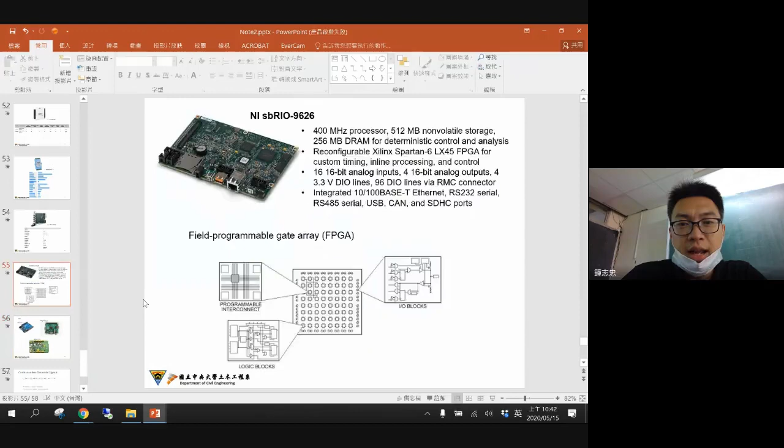This module is from the NI instrument. Right now I'm using the 6000 series for teaching purposes, but this kind of module I also use in my other course for data acquisition. Some of my friends will go back this summer, or otherwise you can choose the LabVIEW course. For this data acquisition, you need to install LabVIEW first.

So here I would like to show you a very quick demonstration regarding the USB 6000. No, they use the NXG. Oh, sorry.

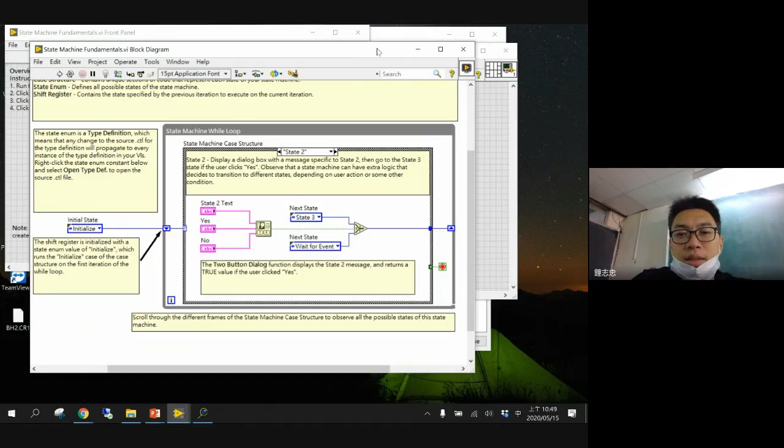I just have a quick example for you of LabVIEW. So maybe in my midterm exam, I will ask all of you the same kind of questions. If I have the purpose of monitoring an earthquake, maybe I will list 3 or 4 DAQ options, and you need to choose the better one for your project and explain why. I think this is a very typical and very practical issue if you are an engineer in the future.

Any questions regarding signal processing and data acquisition? Okay, if none, I think we are going to have the third part. I would like to remind you again, our midterm exam will also include the third part, data interpretation. But here, I think we will have a very good example for you to understand what data interpretation is.

Because right now you have the capability from sensor knowledge - which kind of sensor you need to use. Maybe you need to measure the temperature, you need to measure the water level. So you can choose a better sensor for the monitoring.

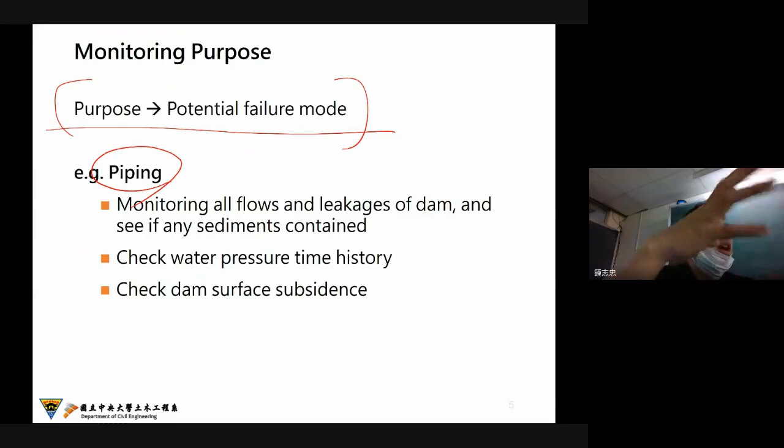For the earth dam as an example, next time we are talking about piping, which will be a very important failure mode of the earth dam. Because if you have piping, it means you have a path inside the earth dam, and this path will become larger and larger, so some of the soil will be lost and you'll have a very big and dangerous path inside the earth dam.

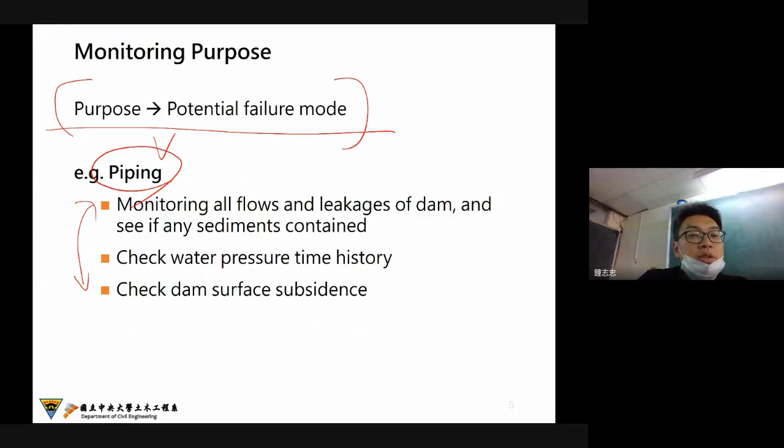So how do we prevent the piping problem? If you already know the mechanism of the piping, what are you looking for as a potential failure mode? Maybe you need to monitor the flow condition inside the earth dam, and also maybe some leakage outside of the earth dam.

Because you can never stop the water flow of an earth dam, there's always leakage, water leakage. But you need to find if this leakage volume changes quickly or not.

And see if there's any sediment inside this leakage water. Supposedly if you have a very good condition and filter for the leakage, the water flow should be clean without any soil particles. But however, if you find that the earth dam's leakage has some soil particles, it means maybe we have the piping problem.

As I said, a path inside the earth dam, and this path already has scour and erosion of the internal soil. So this will be the problem.

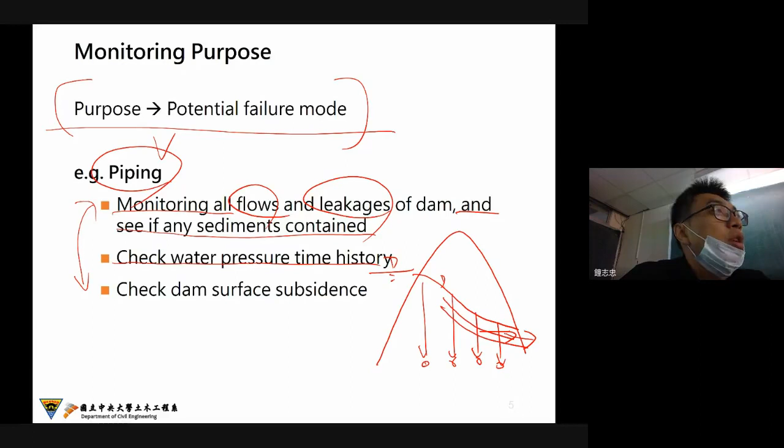And also we need to check the water pressure. We may check the water pressure at different locations to make sure that the underground water level keeps constant. Otherwise, if you have a rising water pressure, it means I have a path of leakage, so it is very dangerous.

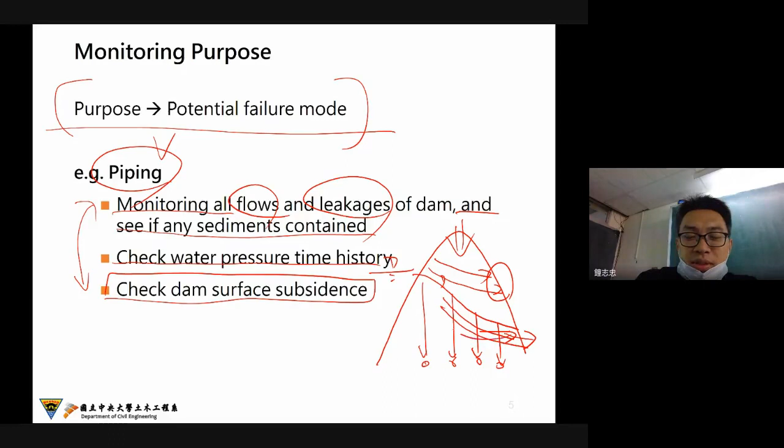And also we need to check the length, the subsidence of the dam, because if I have piping inside this earth dam, I already have internal erosion, so maybe the earth dam...

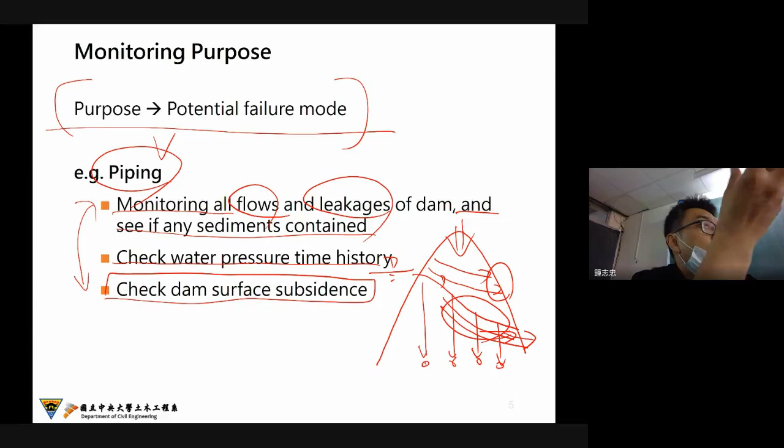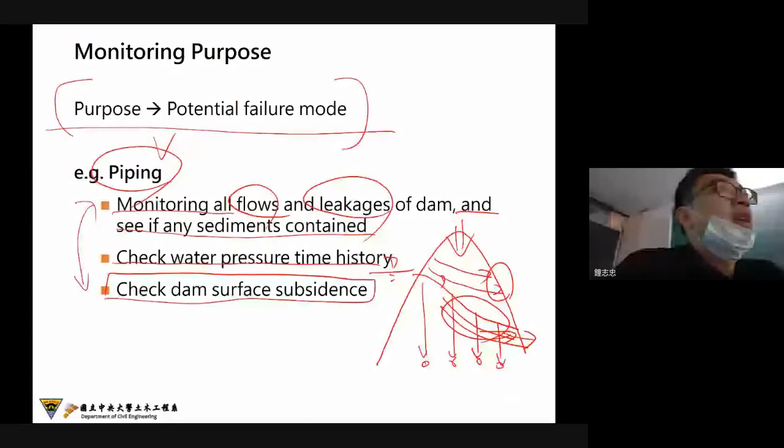Understand the potential failure mode first. So I would like to say this is the basic of the monitoring. Based on this, you will know where the location is that I need to put the sensor, and what kind of message I need to look at.

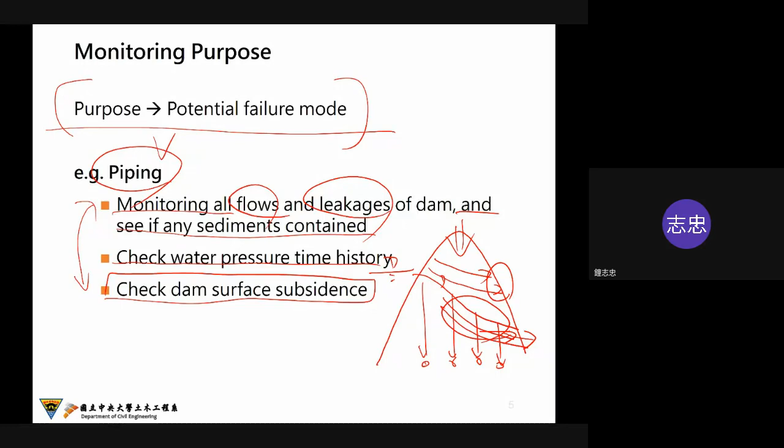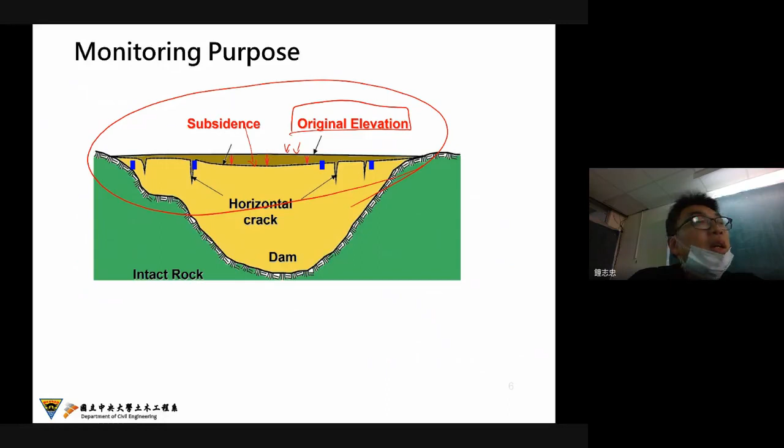So here, this is I think the demonstration showing subsidence. So this is the original elevation here, and here this is the subsidence because of maybe the piping or the leakage, internal erosion.

In this chapter, I would like to show you some methods to help you understand, if you already capture this kind of data, how can you decide if the situation is good or not. So how do you define a criteria? Here we have two methods: one is the qualitative method, and the other is the quantitative method.

I think you already know about this. For the qualitative method, we use some indices: stability, correlation, rationality, consistency, mutation, and symmetry. In the first step of the qualitative method, you don't need to have detailed calculation or some program processing. You just need to know that these indices, maybe six of them, are for the first judgment of the criteria.

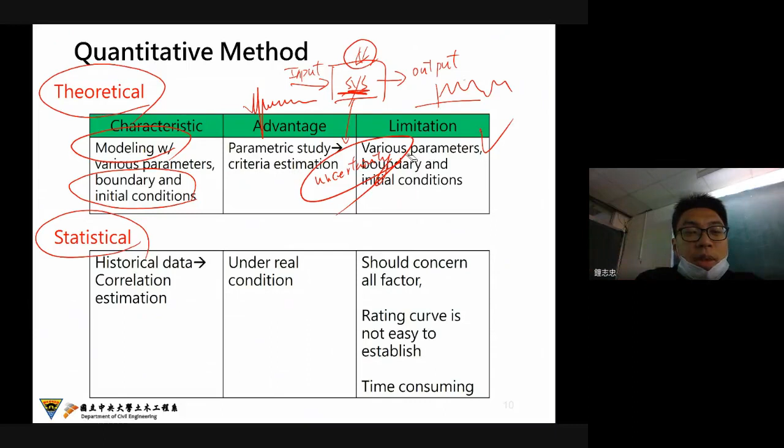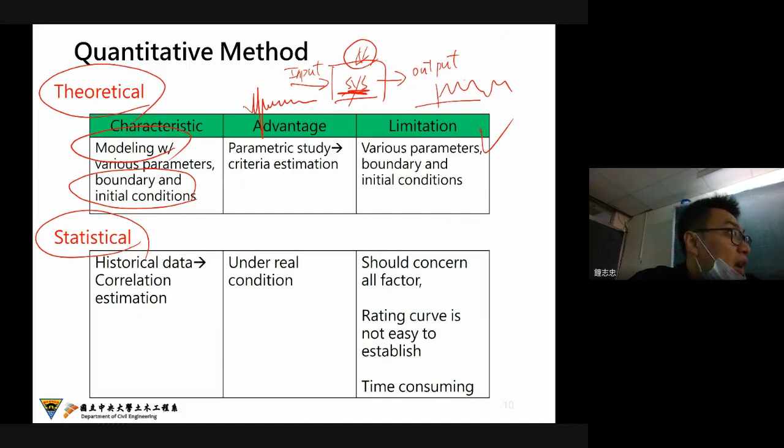So of course, if I cannot fully understand the system, there may be some uncertainty because of unknown parameters. So here is the limitation of the theoretical method: you need to access all the parameters of this system first, and of course you need to access all the boundary and initial conditions, so then you can simulate and have a forward model to predict the behavior. So this is the theoretical method.

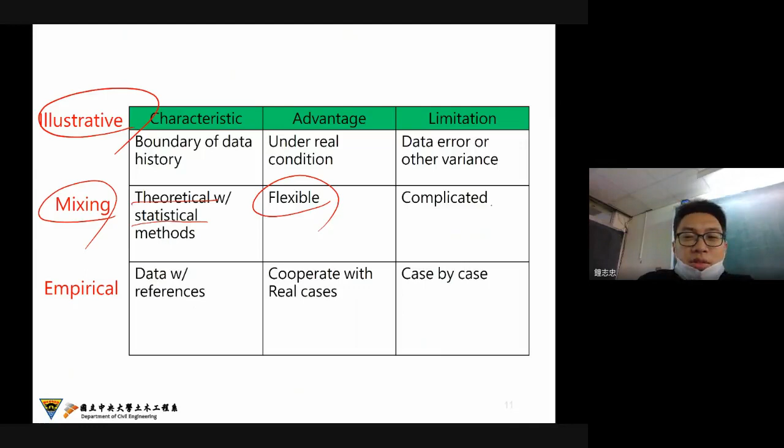But somehow I would like to say, for geotechnical applications, it is hard to find all the parameters. So I would like to say, most often we use the statistic method to quantify the data and find the criteria for early warning. Here is some of the illustrative method. I would like to show you next, and we can mix the theoretical, the statistic, and also the illustrative method together. It should be much more flexible, but if you combine several methods together, you need to think about more. Finally, there is the empirical method with quantified data.

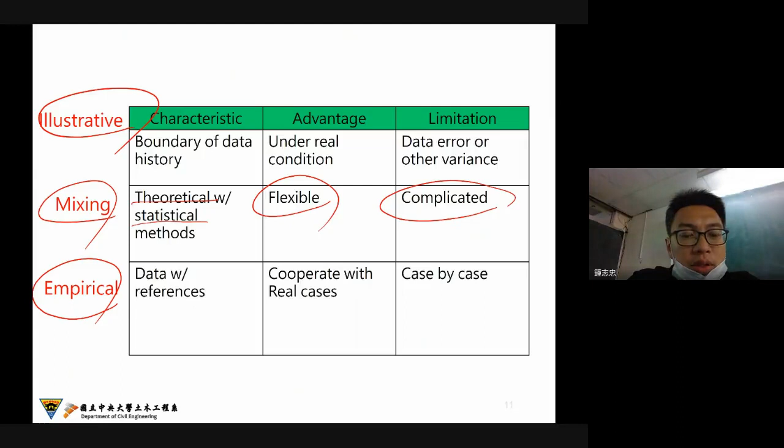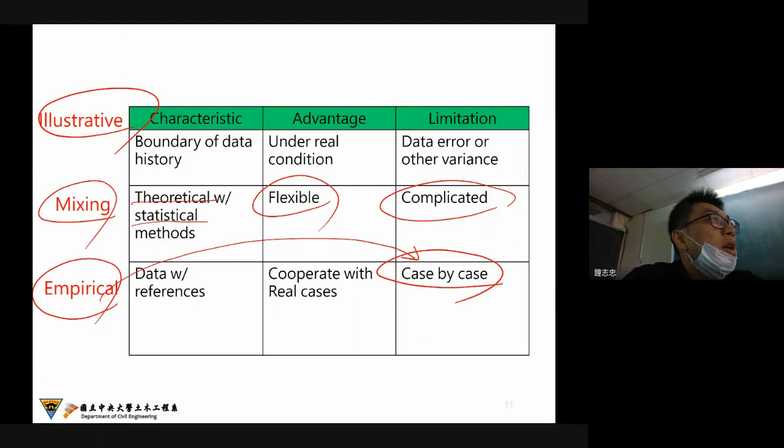But I would like to say this will be case by case. This is not a universal solution for all. Using empirical data, it can only be used for the specific case.

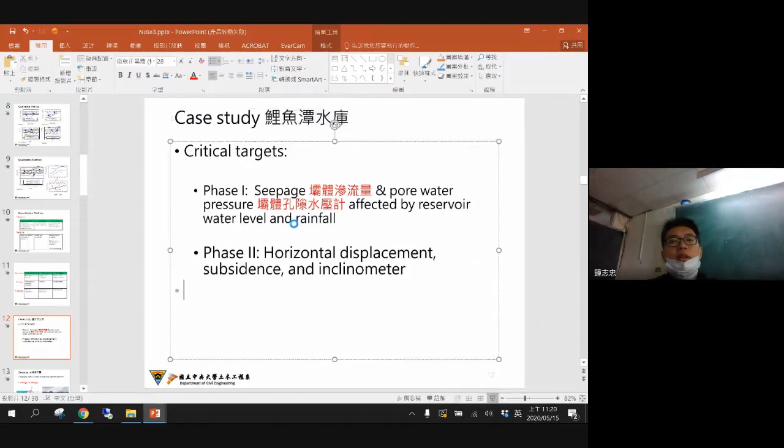The first part of this dam safety interpretation, I'm trying to monitor the seepage, the flow, the volume of the leakage, and also the pore water pressure, against the water level and the rainfall, because I'm trying to quantify the relationship between the seepage or the pressure with the water level and the rainfall. I want to understand the behavior of the seepage. If I have a big problem of the seepage, I would like to extend to phase 2: the horizontal displacement and the subsidence, and also the inclinometer inside of this earth dam.

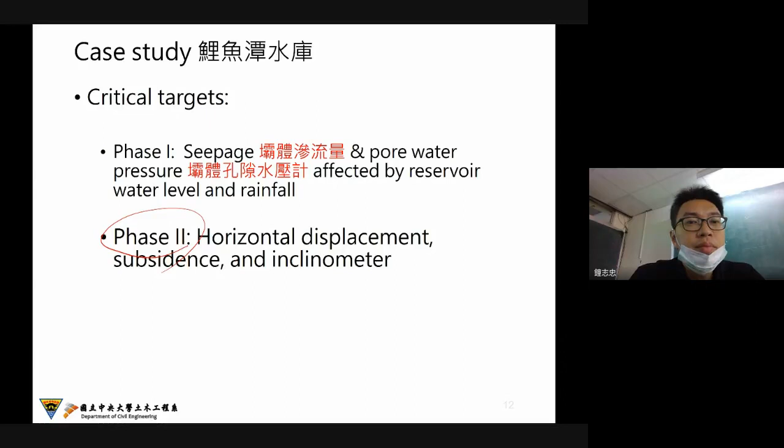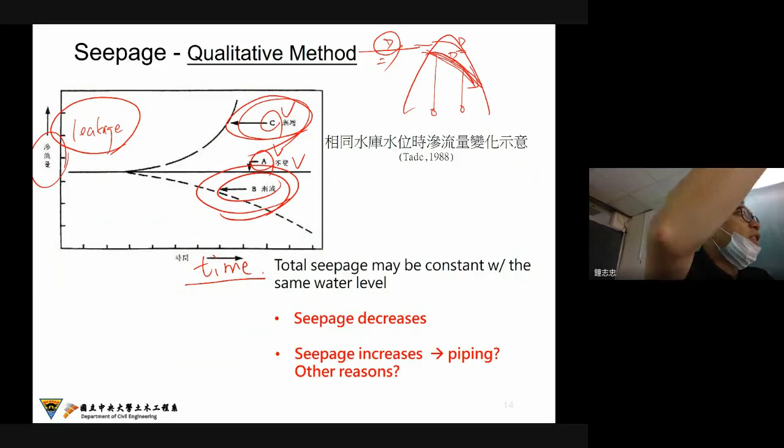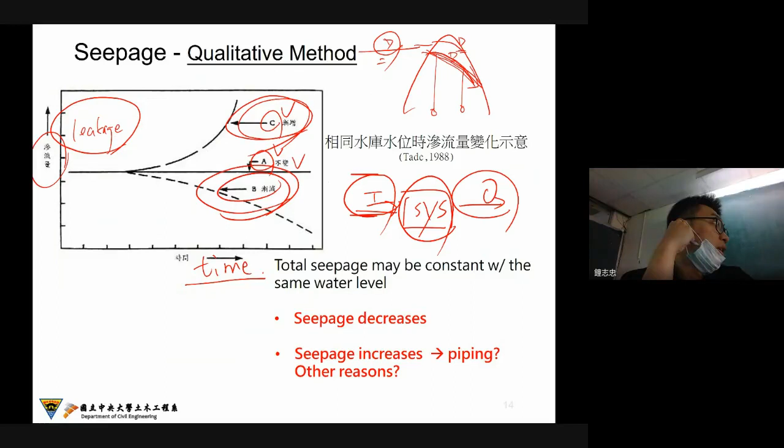So we need to understand: if you have a constant water level, should I have a constant response? Because, as I said, same input, same system, so the output should be the same. If I have the same input but with different output, there's only one reason: the system changed. So please notice why the seepage decreases or increases. You may already understand that it may be because of piping or other reasons.

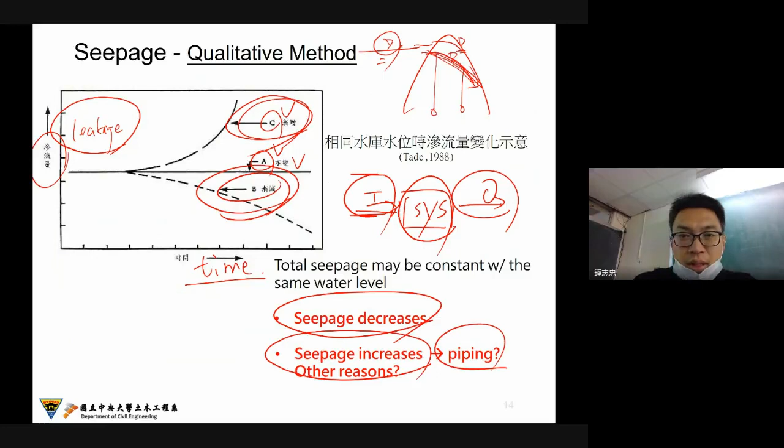And there's another relationship between the water level and the leakage. In the previous qualitative analysis, we just tried to capture the pattern, but in the quantitative analysis, we are trying to capture the value and also the real relationship between the water level and the leakage. So actually, this is the theoretical one, a linear relationship with the water level.

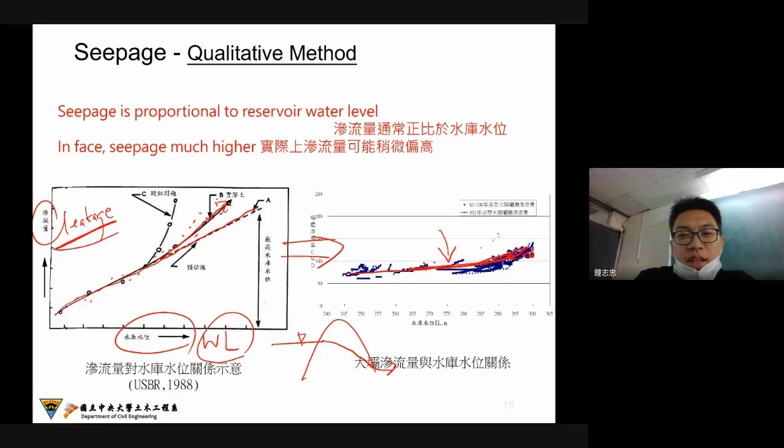But if you already have this kind of data, somehow someday if you have a typhoon event, I already found some data like this one, several data here. So I would like to say this might be a problem compared to the previous relationship, right? This is very important, because if you can quantify the relationship, you can quantify a criteria.

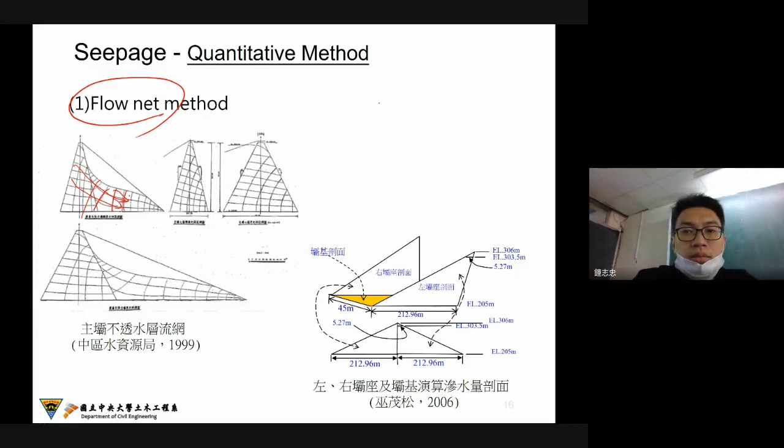I would like to return to the theoretical one. This is the flow net. Never learned before? No? Anyone? Only you. I think in soil mechanics we already showed you the flow net method, because if you already know the gradient of the water flow, you may plot the path. This is what we call the flow line, and the vertical one is the gradient one. Okay, so if you already know that, for example, I just have a very quick understanding for you.

If you already know the difference between these two, H1 and H2, we can use the flow net method to plot. This is a flow line, and maybe this is the gradient line, because of the change of the water level gradient.

So actually, I would like to say this depends on K. What is K? This is the hydraulic conductivity of the soil, meaning the transportation velocity of the water inside the soil. So you need to understand K, the transport velocity of the water inside the soil, and then we can determine how much water volume for the leakage.

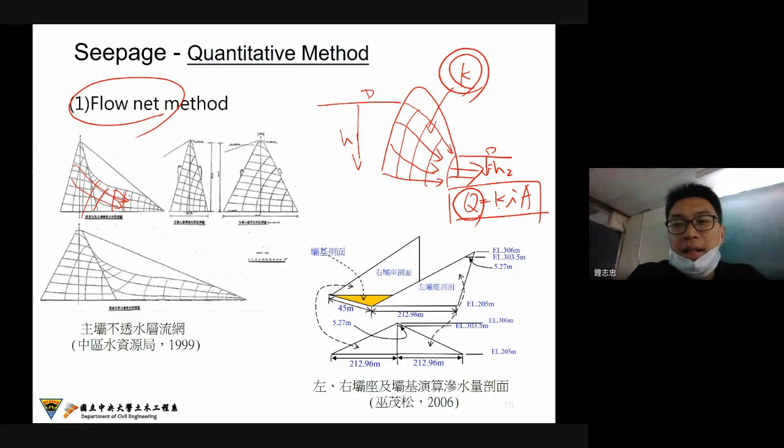So I think this equation is very famous. What is that equation? What is the name of this equation? We call this what equation? I forgot the name of this equation. But Q is the volume of the leakage, and K is the hydraulic conductivity. And I means the difference of H1 and H2, meaning the difference of the hydraulic gradient. And A is the area of this cross section.

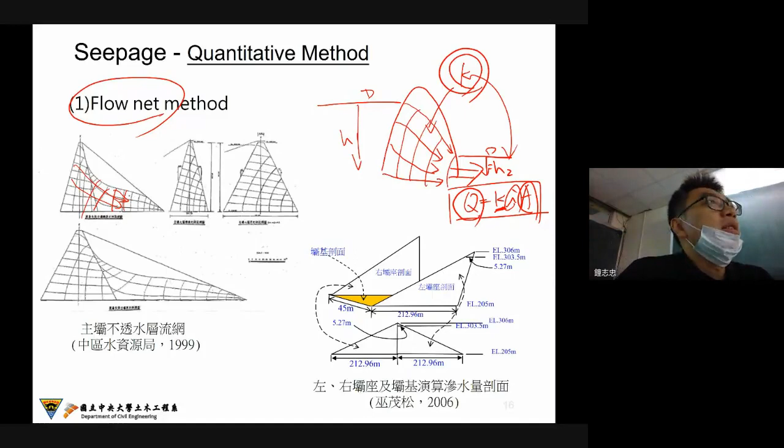So if you already know the basics of these parameters, we can estimate Q from the theory. However, some of the parameters you cannot find very easily, because inside the core we have a K1, outside the core we may have a K2. If you have a different material, maybe you have a different K, I mean a different hydraulic conductivity of the soil.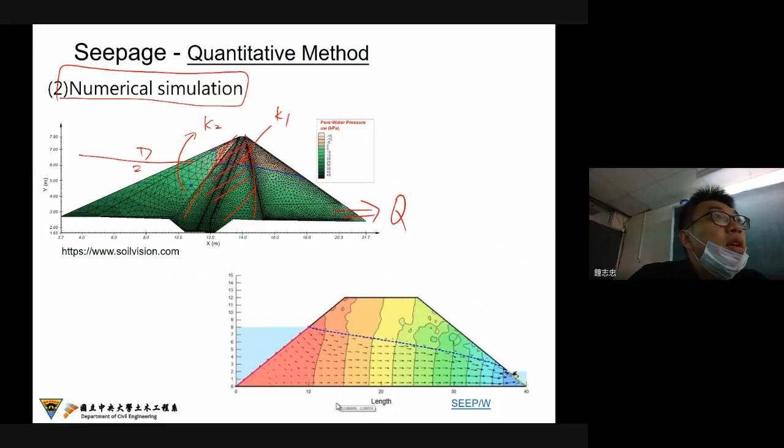So right now we would like to use numerical simulation to predict: if I have the water level, how much volume of leakage can we estimate? And also this is another one, this is the flow. So we can use the numerical simulation to solve the flow problem and get the result of this Q.

So maybe we can plot Q, this is the leakage, and also this is the water level. We can estimate a theoretical one like this.

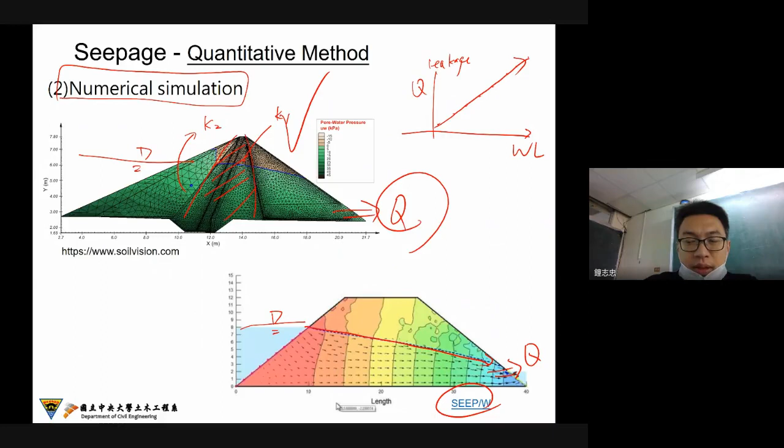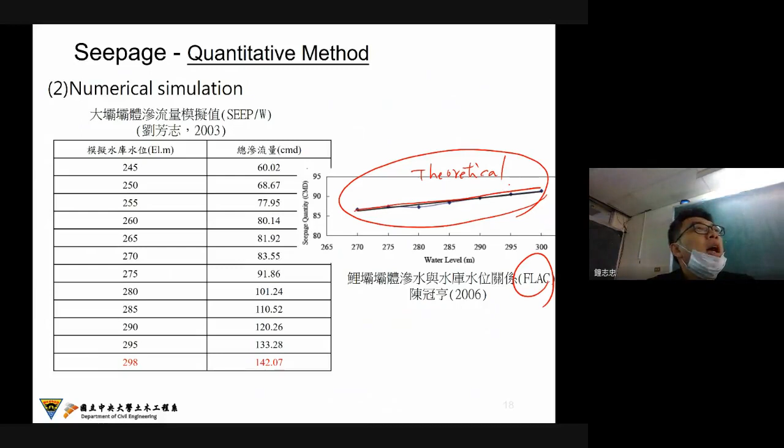So here, this is an example from Liyutan. This result is from the FLAC, like the list. This is the FLAC, and this is maybe from the SEEP. So we can estimate the theoretical one, and this will be the criteria for the monitoring.

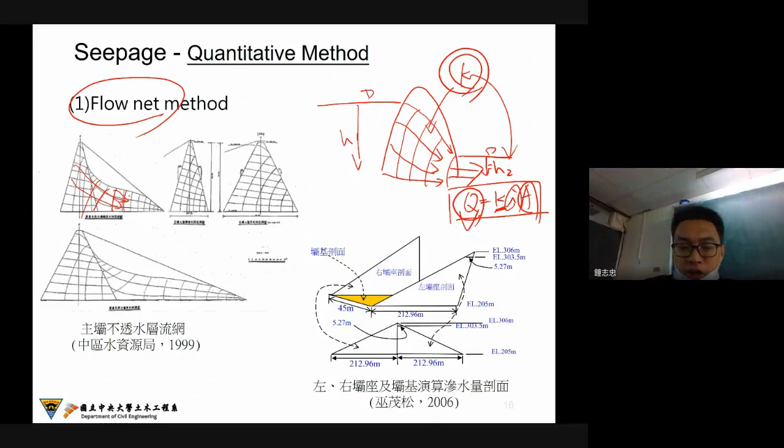But based on this time history data, how can you find whether it is normal, abnormal, or dangerous for this earth dam? How can you judge? How can you interpret it? So here, actually the same, we are trying to compare the water level and Q, the leakage volume. But you can find we already divided the data into the dry season without rainfall, because I would like to say it is not so easy to plug in. Please look here.

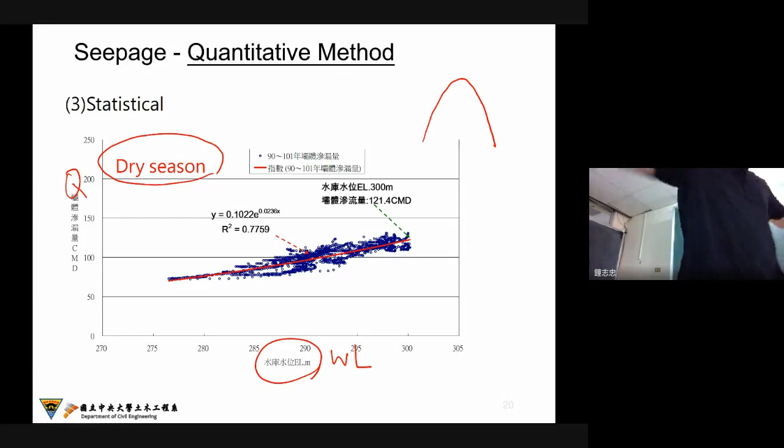In practice we may have this kind of problem. So for this example, they're trying to exclude the effect of Q1. They try monitoring the data in the dry season without the rainfall effect, so we can get a regression line for the contribution from Q2.

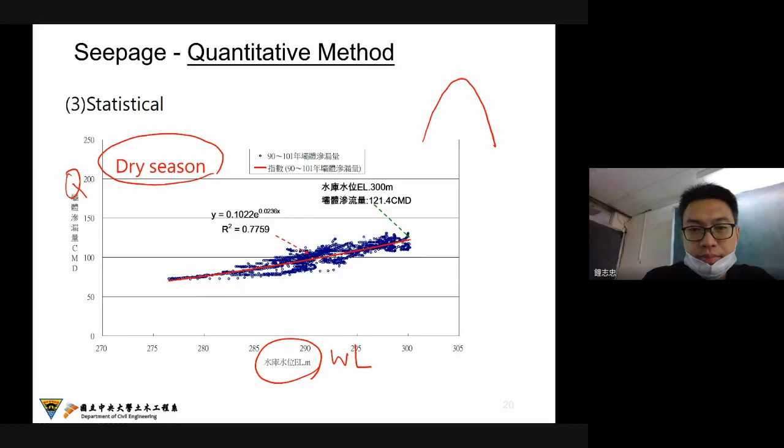So how can we determine the criteria for this kind of variation data? We may need an envelope, to make sure that all the data should be inside of this envelope, and we think it is safe based on the statistic data and the illustrative envelope.

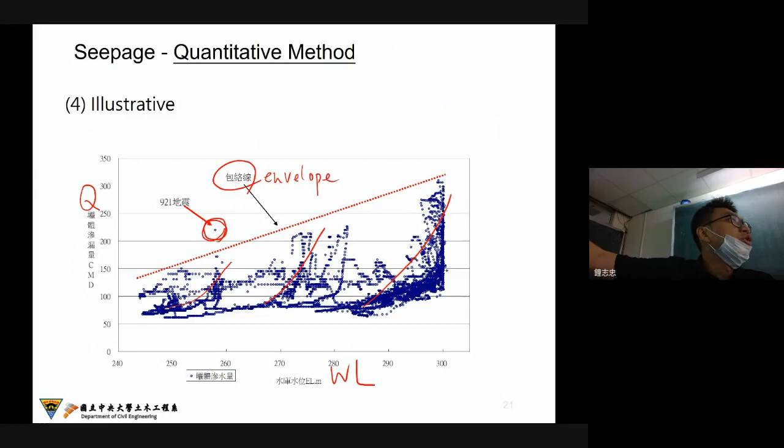But you can find here there's abnormal data, because this data was observed from the earthquake 20 years ago. So I would like to say, if you have some abnormal data, an outlier outside of the envelope, you need to notice, and maybe this is due to some very big event like the earthquake, or the biggest rainfall typhoon event ever.

So this is just the same idea. This is the water level, this is Q, and this is from the seepage method and the FLAC and SEEP simulation. So we already predict the value like this, but this is the statistic. When I have a water level of about 300 meters, maybe I have only Q of 109 or 120.

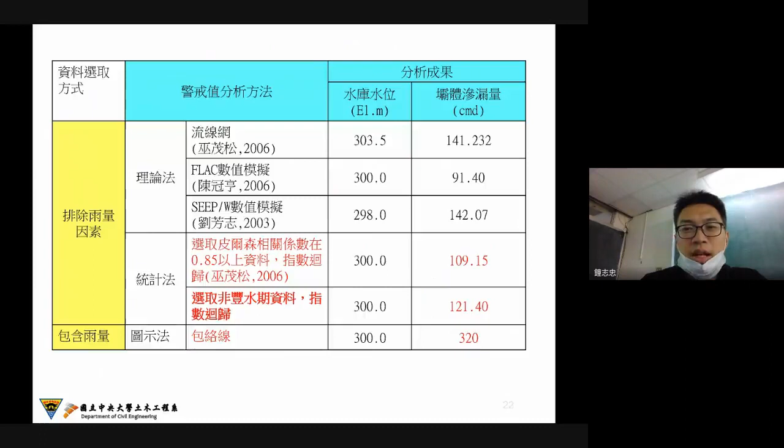And this is the envelope. So here, the upper envelope we define into 320. Again, we're just talking about the relationship between the water level and the volume of the leakage. You can also apply the same idea to the water level and the pore water pressure.

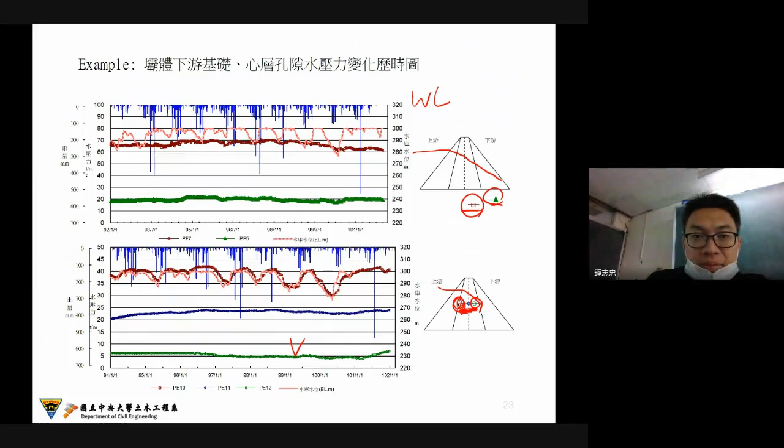So here you can find the pressure in the upstream is totally the same as the water level. But here, center and downstream, the downstream should be much more stable because of the core. So we may interpret this kind of data because we already know the behavior.

So you can have this water level with the water pressure, and you can get the regression line and also the standard deviation. So next time, if you have a new record and a new observation, you can check if this data is still in the relationship between the water level and the pressure or not, and you can tell why.

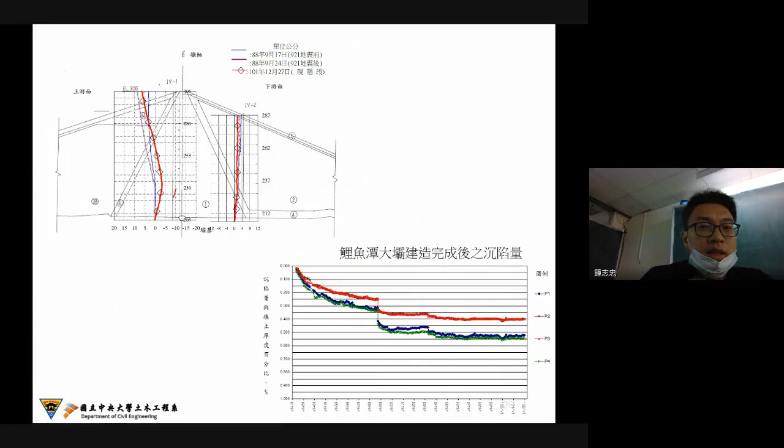And I also try to explain the rest. For example, this is the inclinometer data inside of the dam here. You already know from a previous homework about the inclinometer. So with time, you can find a change of the displacement, and with time, you can find this is the subsidence measurement.

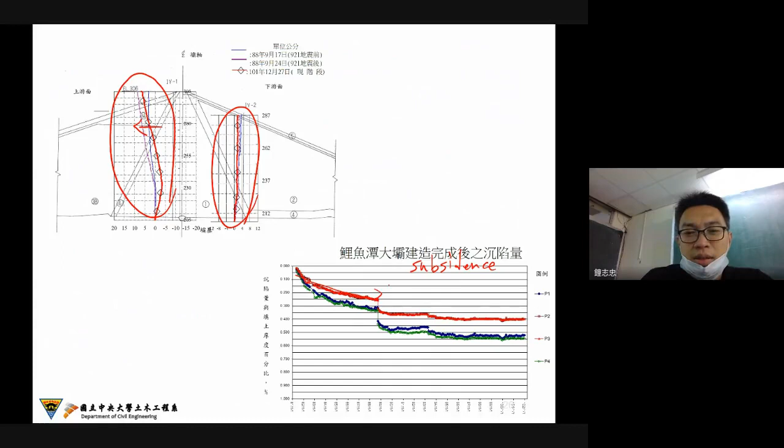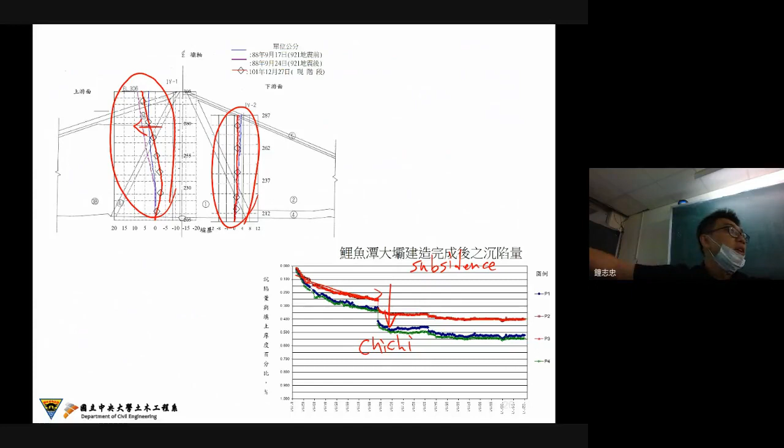So here you can find this is the real data. Why? In this time we have a big difference of the land subsidence because this is the time of the Chi-Chi earthquake, the 1999 earthquake. For this I would like to say it is very easy, you don't need quantified data, you just look at the trend, right?

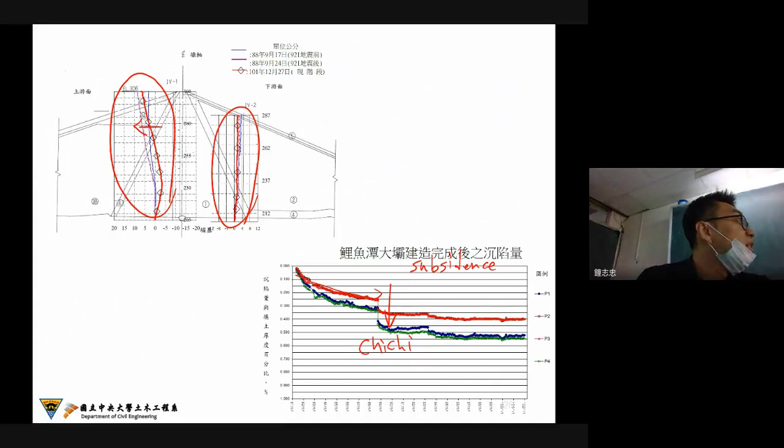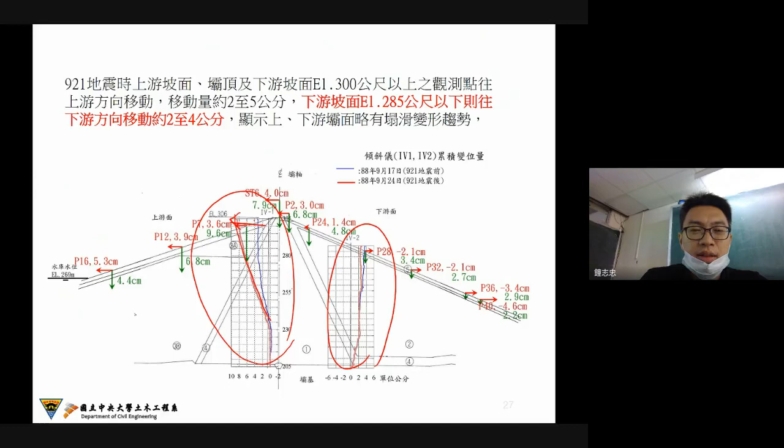So you can have a very quick interpretation of the land subsidence because of this drop, so maybe we call this a mutation problem. Here, this is the detail of the inclinometer. After the Chi-Chi earthquake, here you can find a big difference of this deformation, and this is the upstream, and the other side is the downstream. This is the real data. So you can understand, it is very easy for your quick understanding of the behavior of the earth dam.

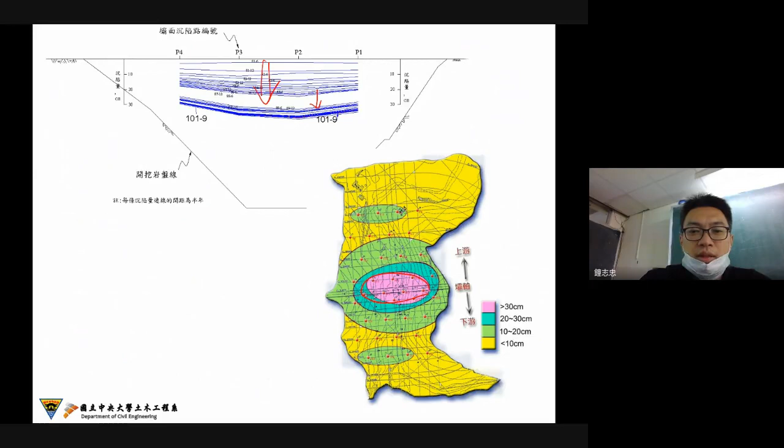And also this is the real data from this, I just plot it in a cross section with a different day. So actually this is the surface, and I have a measurement with the subsidence in each year. So here, a very big drop because of the earthquake, 921 earthquake. So this is the main location of the land subsidence, maybe more than 30 centimeters.

So I would like to say here, we already talked about the seepage, so maybe you need to exclude the rainfall effect. You need to think about the water pressure correlated to the water level with maybe a statistic method, and also the deformation, you can use theory or the time history. And somehow you can predict because of a great event like the earthquake, the 921 earthquake, or the rainfall in 2009.

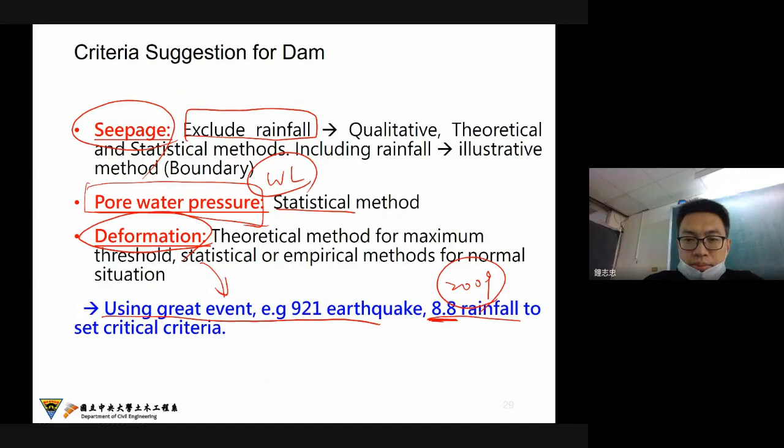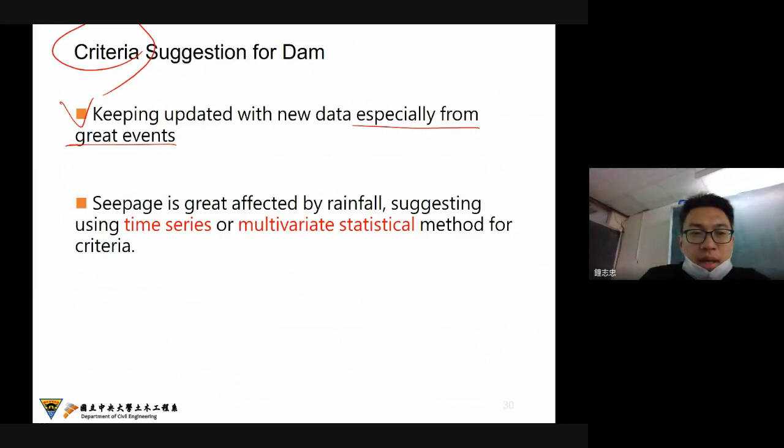And I would like to say this criteria should be updated with the time, should be upgraded with the time, especially when you already have a great event. So you can examine whether the envelope still works or not, you need to update it. And also, I already talked about this.

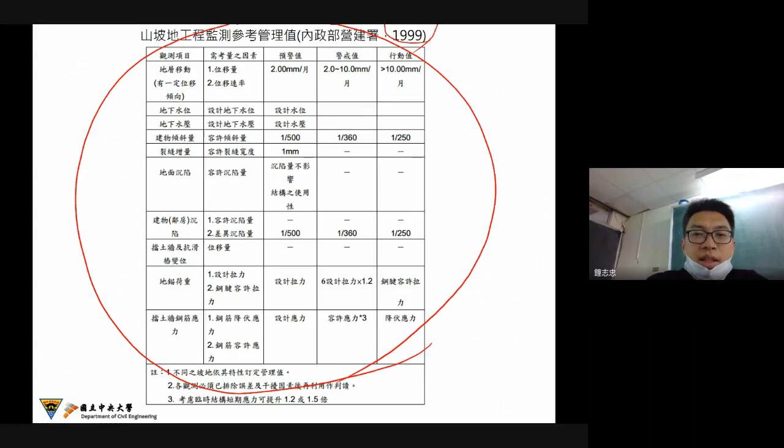And in Taiwan, we also have some reference for landslides from 1999. This is in Chinese, but I think it's just for reference to talk about if you already know the velocity. This is the time, and this is your deformation, and you already know that, so you can calculate the velocity. So here, low velocity, higher velocity, dangerous. So you can use this kind of velocity to check the stability of the slope, using the point of view of the sliding velocity.

1 minute left, I would like to show you some of the advanced signal, I mean the data interpretation methods like the R/S or the catastrophic model. But I will quickly show you the end. This is R/S, originally for the river level variation, but right now it is used for settlement prediction.

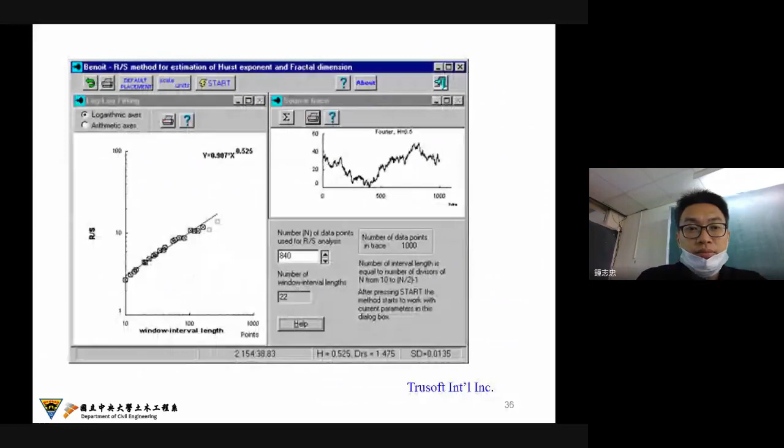And also here in these 5 years, we are talking about AI, artificial intelligence, or machine learning. So if you already have the data, can you predict with AI or machine learning? Right now I'm doing some jobs for the data interpretation. But I would like to say, if you try to use AI or machine learning, you always need to remember that you need good and enough data for the training, because you need to know the data before you predict. So this is the basics. That's why I encourage you to have a good understanding of the monitoring before the analysis.